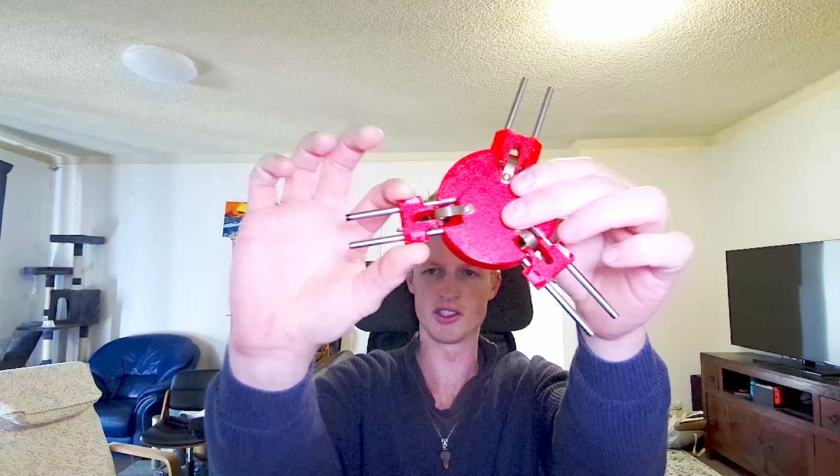Now, I did mention in that old video that adding constant force springs to the hand to pull the little slider things back in should help the problem quite a lot. And I ended up doing that for my next design, which I have here. And we can see on the bottom here, there are constant force springs that pull the sliders back in again. And this design works really well. It slides quite nicely on the rods, but it still gets stuck occasionally. And as I said before, sticking is not okay.

There is one other thing that I changed with this design as well, which is that I cut out a large part of the section that grips on the upwards guide rods. And the reason why I've done that is because it allows the little sliders to have a bit more wiggle room, and the idea there was that it would stop them from binding and catching as often. And it does a pretty good job. This slides relatively freely and only really gets caught when I push it at weird oblique angles.

So this design does do a pretty good job of not sticking, but as I said before, it's not perfect, and every now and then it will stick, and I really want to try to remove this as a source of problems in the future. So sticking is not allowed.

The second problem is one that I haven't actually had yet, but I've been anticipating it for quite some time. And that is that if the ball comes in and Jugglebot is slightly off in its timing, then the ball is going to hit what is essentially a rigid plate and jiggle around and move and do things that I don't want it to do. So for the same sort of reason as the hand sticking, the hand being out of sync and too rigid is a problem.

Now, I could tackle this from the out of sync perspective, where I try to ensure that the motors are perfectly in sync all the time, but with reality being what it is, I don't think it's realistic to expect the motors to be to the microsecond correct every single time. So for a long time, I've been trying to think of ways to incorporate a spring or a damper into this system to absorb any excess energy from the ball before it leads to the ball jittering around. But I haven't been able to figure that out yet.

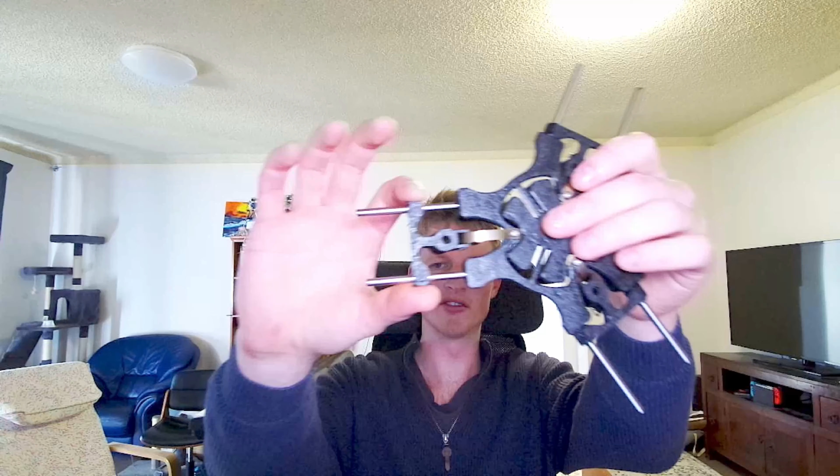There are also constant force springs in the back here, and these help to pull the carriers back in, and will help pull the hand back down faster than gravity otherwise would. The real meat and potatoes of this design, though, is the compliant nature of it. And you can see here that it's actually very, very, very compliant.

So I can hold that fully horizontally, and this part, it's sort of hard to capture on camera, but this can bend quite a lot and move around quite a lot. And it's very nice to play around with. It's got a really nice feel to it.

What I want to walk you through now is how I actually went through the design process to arrive at this exact layout. And it's not super trivial, but it's actually not that hard if you have access to a good CAD software like SolidWorks. The first step to designing any compliant mechanism is to first figure out what motions you want your mechanism to achieve.

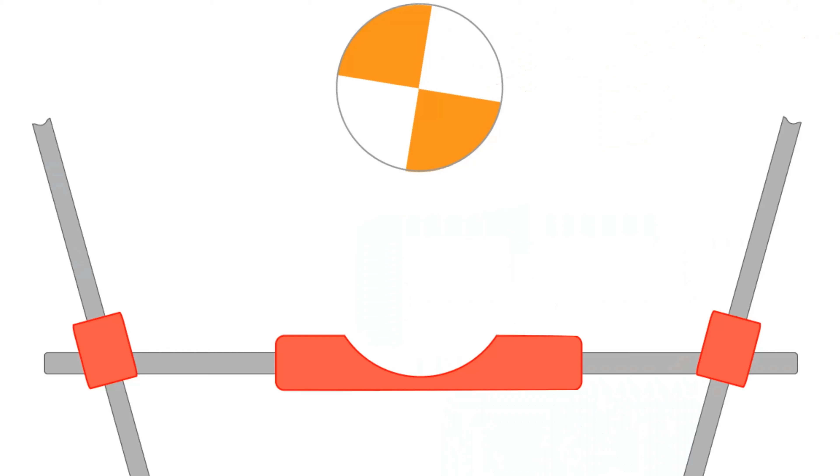In my case, I want the cup part of the hand to be able to sink lower than the sliders, which are, for all intents and purposes, rigidly fixed in place because they're being held by the cables that wrap around down to the ground. For this to happen, the slider rods need to bend upwards, which means that both the cup and the sliders need to flex. So I need two types of compliant mechanism here.

Because I think it's more interesting, let's have a look at the cup part first. Now, this part has two design requirements. The first is that it needs a ball sort of shaped part to actually catch the ball. And secondly, as we've just figured out, it needs to be able to allow the rods that the sliders run along to tilt upwards. The first part is pretty straightforward. I just need to have a little spherical cutout of whatever I end up making and job done. That can receive the ball.

The second part though, of allowing the rods to tilt upwards, is a little less straightforward. I'm not going to go into full details right now of how compliant mechanism design works, but if you're interested in this, and it's a very interesting topic, I suggest checking out the lecture series delivered by Professor Jonathan Hopkins on YouTube. This is a super interesting lecture series, and I have learned a tremendous amount from it, even though I'm only up to lecture 7 of, I think, 12. It's really good. I strongly recommend it.

As for this specific problem of needing the rods to tilt upwards, it should be relatively intuitive that if you have a thin sheet, and if you fix one end and push the other end, then that end being pushed will tilt upwards. It will also move upwards, but I don't really care about that motion. I just care about it tilting upwards. So if I can attach my rods to the center of the hand via a thin sheet, then I should get the desired compliance that I want out of my design.

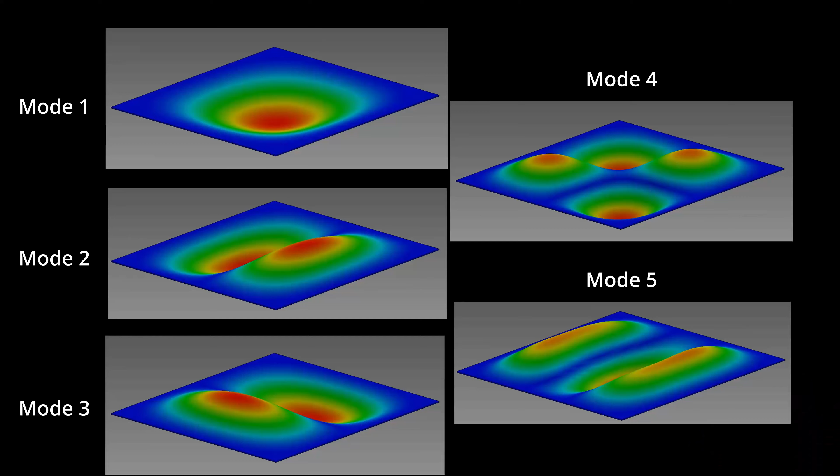To generate these modes, I'm making a SolidWorks frequency simulation which sweeps through all frequencies and shows the first 5 mode shapes for the given object based on the material and the boundary conditions that I've applied. In the case of this square plate, it's being fixed at all 4 sides, and so only the middle part is allowed to actually move.

This relates to compliant mechanism design because the mode shapes that you get as a result of doing a frequency sweep almost always correspond to the ways that your design is happy moving in. And so what you can do is run a frequency sweep, see what your mode shapes look like, and that will show you the ways that your object will move. That way you don't need to print it off, you can just prototype from your computer and see exactly what it's going to do. For the current design of the hand, this is what those mode shapes look like.

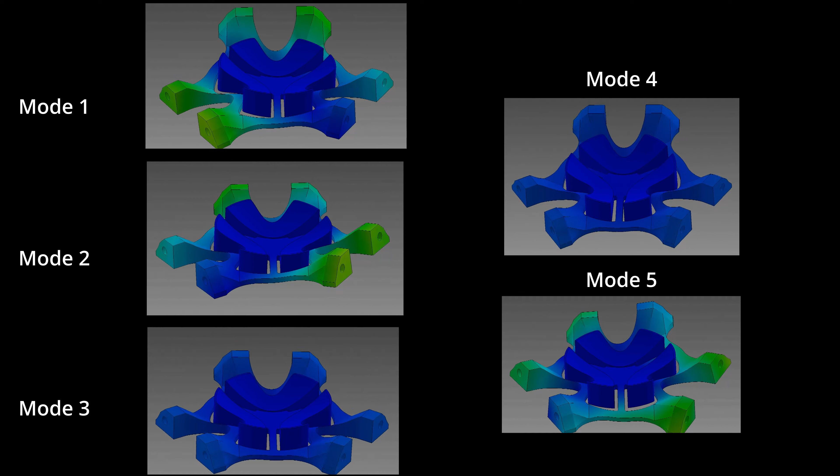I really don't want the hand to be moving in those ways. Thankfully, there will be no force exerting a twisting motion on the hand, so mode 4 won't be an issue at all, and mode 5 shouldn't be a problem since I really can't think of how the actual forces involved would work to deform the hand like that.

So, after running a frequency sweep and checking the first 5 modes and confirming that they're either deformations that we want or deformations that aren't a problem, we can be pretty confident that this design will give us the exact output that we want and should be quite rigid in all other directions.

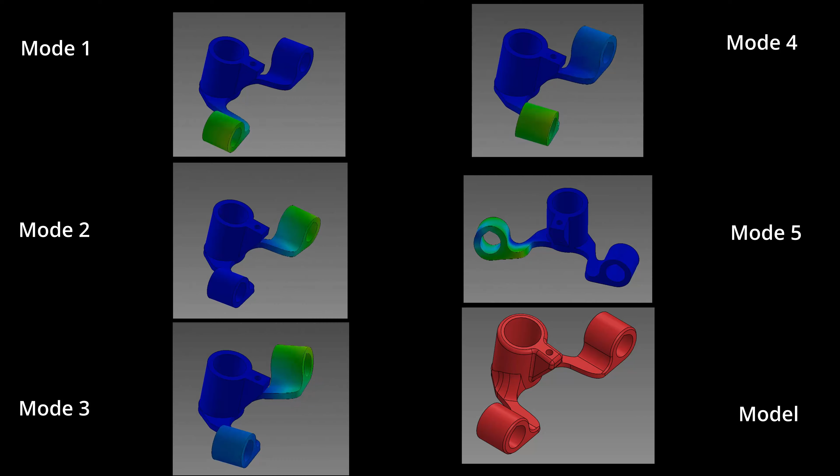Now that the cup part is done, we need to do the same thing but for the sliders, because if the sliders don't allow the rods to tilt, then they're not going to be able to tilt at all anyway. My first design for the sliders looked like this and had these mode shapes. After seeing these really weird mode shapes that were created by this design, I went back and changed some parts around to arrive at the current design, which looks like this and has these mode shapes.

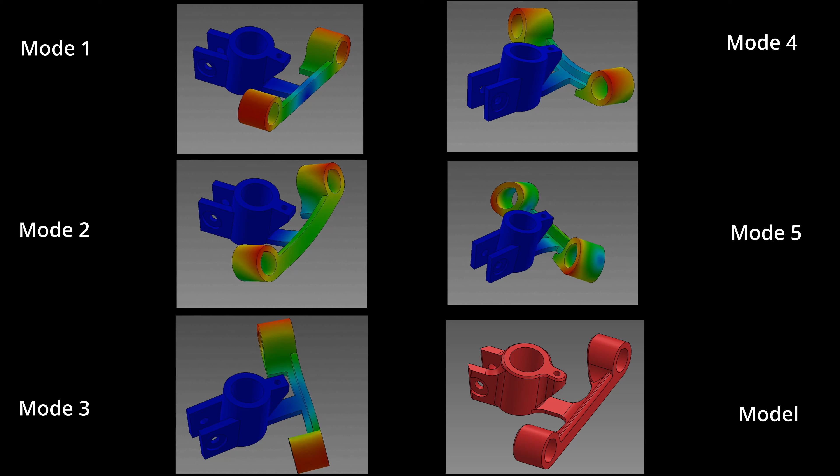Note as well that I also added on 2 little tabs to hold the constant force springs, which I didn't have on the original design because I was still just prototyping then. This second design behaves much more nicely, with mode shape 2 being the exact form of deformation that I want. Mode 1 shouldn't happen because there won't really be any forces acting to deform the body like that, and the same thing goes for modes 3, 4, and 5. So I can pretty confidently say that they shouldn't cause too many issues for me.

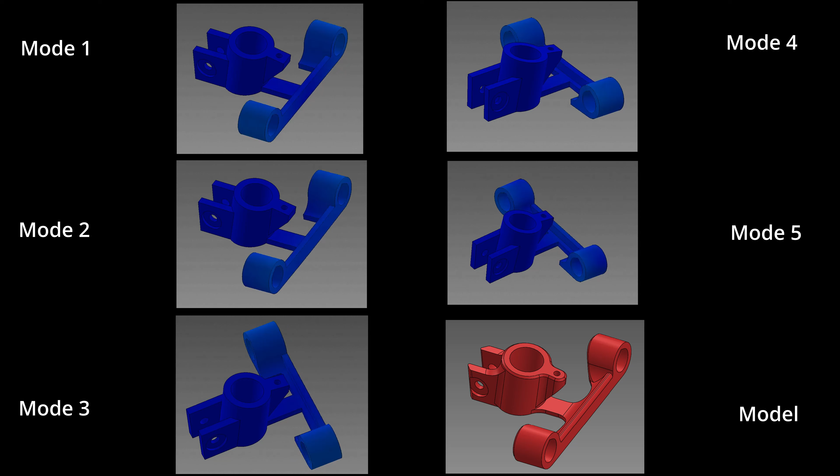Putting everything together gives this. This design has a really nice sponginess to it, and will hopefully do a really good job of absorbing any of the excess energy that the ball has on its way in to give it a nice smooth catch. If I do need to adjust any of the stiffnesses here, I can just simply adjust the thickness or the length or whatever geometry I need to of that thin sheet so that it is more stiff or less stiff as needed.

This design also slides really nicely along these rods, and to be honest, that's probably almost entirely thanks to those linear bearings. But the compliant mechanism part helps as well because it allows the asymmetry between the cables that pull this slider up to be quite a bit more. Like this can raise up way more than the old design could. And even though I'm only pulling one, I can still sort of pull the other ones up as well. It's a much, much more robust design than the one before was.

This should slide even more smoothly once I've put this whole component into the rest of the frame that makes the top part of Jugglebot, because this will hold these rods in place so they don't bend around like this, and it will make the whole thing a lot more rigid. The only reason why I'm keeping it separate for now is because I didn't really design this whole mechanism to be reattached over and over again, and the parts that hold these rods are starting to break a little bit, and I'm keeping this separate for now just while I'm prototyping the hand until I get this pretty solid, and then I'll put it all back together again.

There are undoubtedly going to be problems with this design at some point in the future, and I'm almost certainly going to have to change it. But for now, I'm super happy with this design. I think it is working a lot better than the previous design was, and I'm very keen to see how well this works once I actually get everything put together properly. That brings us to the end of this video.